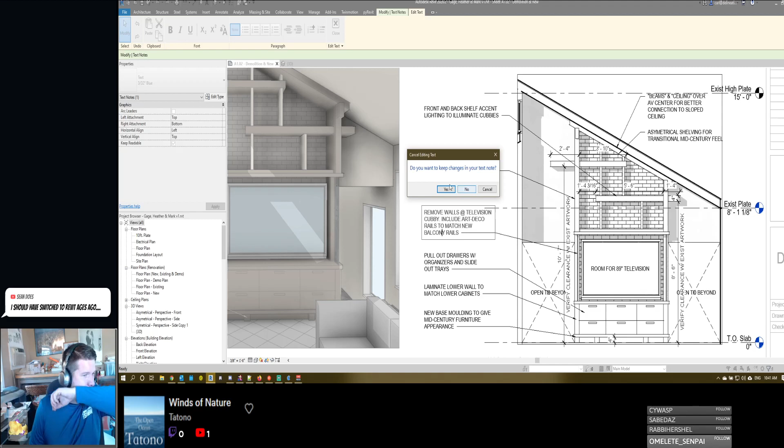Goodness. That didn't seem to help right there, did it?

In your professional career, you'll have plenty of chance to use it, so it's not the end of the world. I wasn't using Revit when I was in school, so.

And truthfully, there's a really good chance, because if you think about it, Revit's not new, it's starting its end life in terms of how long it's been in the industry. So there's a really good chance that you're probably going to end up coming across new technology and software that blows Revit out of the water. Who knows?

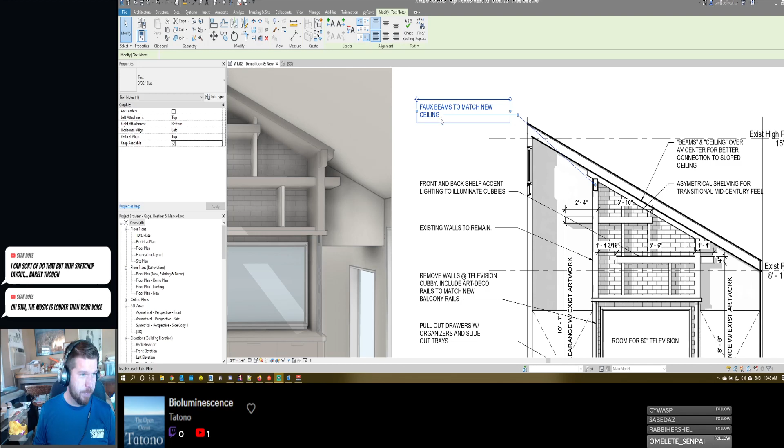Hopefully that's better. Thanks for letting me know. It's hard for me to tell because the music in my headphones is different than the music that's being piped out, in terms of volume. Maybe I don't need this one. I think that's what it is. Is it still too loud?

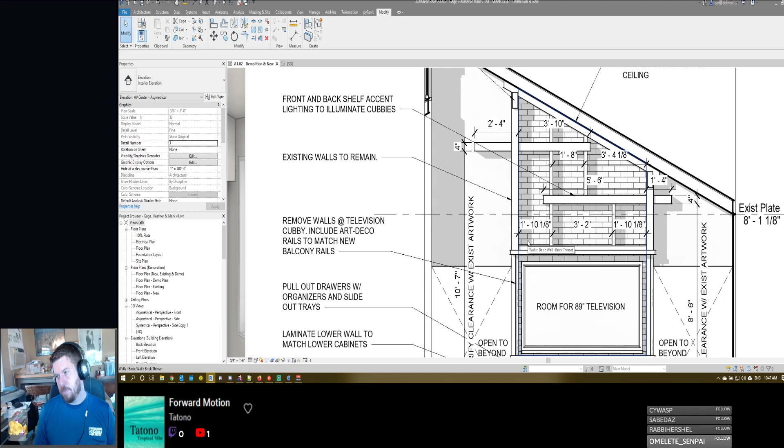I'm gonna need another section right here, probably. I feel like this needs to be at a larger scale. I think that's what I'm going to do. It's a half-inch.

Let's move this out of the way for now. I didn't mean to do that. This will make no sense now.

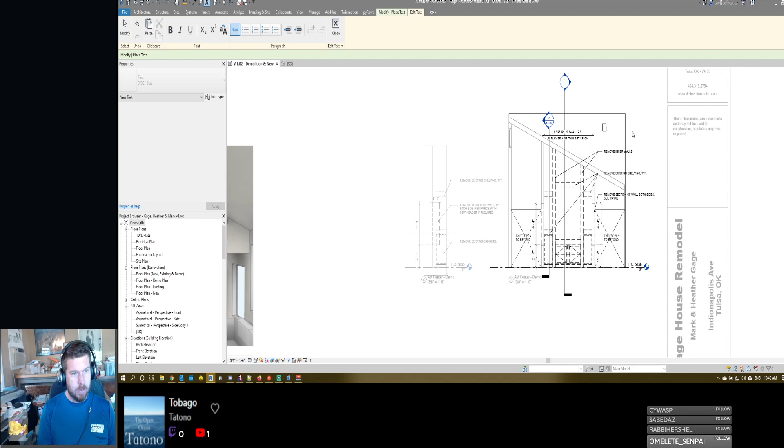Remove inner walls. Need to put a note up here: contractor to verify structural integrity of existing systems prior to removal of those.

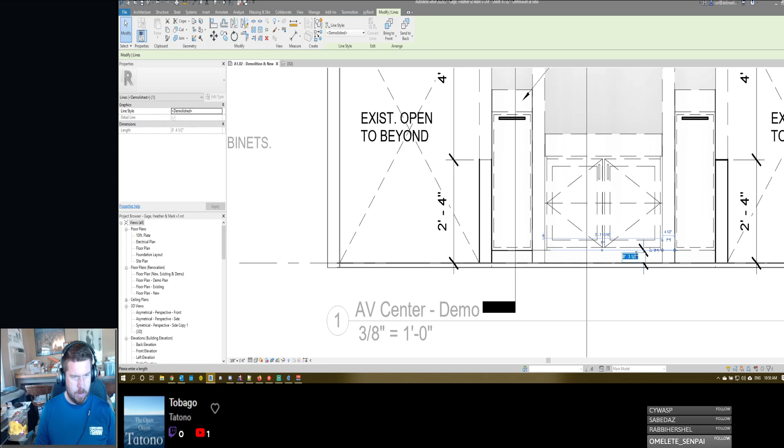Huh. Guess I can bring this out to match this.

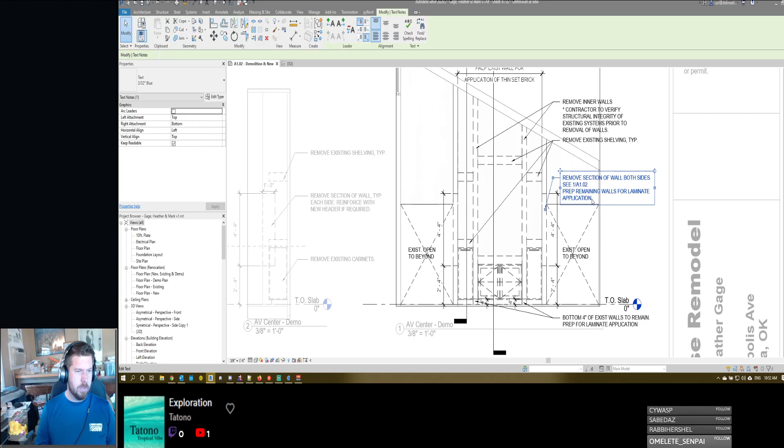Also need, there's another section right here. I should actually probably just do this.

Should I do it inside the dimension line? I think it needs to be outside the dimension line. Maybe the dimension gets a little closer too. There we go, make sure that gets through there.

Remove section of wall, typical each side. Reinforce with new header if required. Let's do... oh goodness, what did you just do? There we go. And what we need to do.

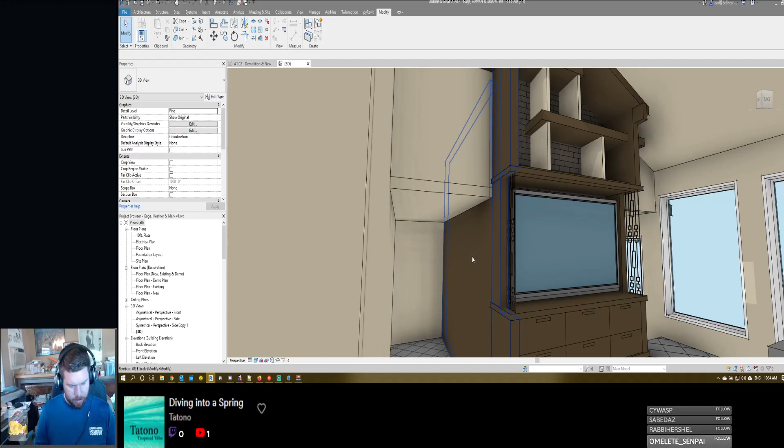How do we transition laminate? So we need some kind of transition right here. Resistant paint, laminate, transition.

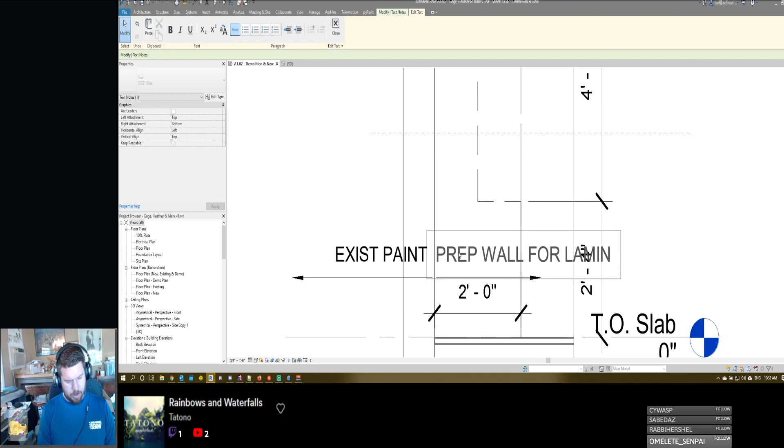I'm gonna put some text here: existing paint, prep wall for laminate application. I have to think about how that works also.

Already got that right there. Not sure how that works. I have to look into that.

This is where that's going to be interesting, because if I do a quarter round, it does something different here. So I'm not really sure what I'm going to do about that yet.

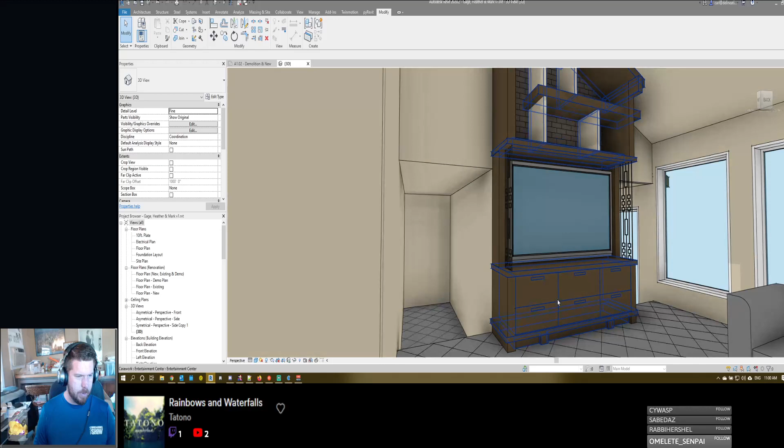Alright, I do need a section through here. Oh, for crying out loud.

Somebody's got something going on the grill. Yeah, we don't need to show that one. Yes, it is just Valor's turn.

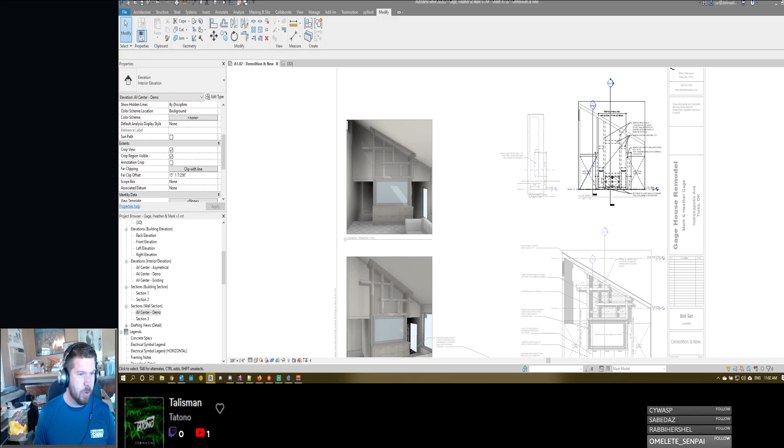Good. Oh boy, that doesn't look like the section that I just made. Here we go.

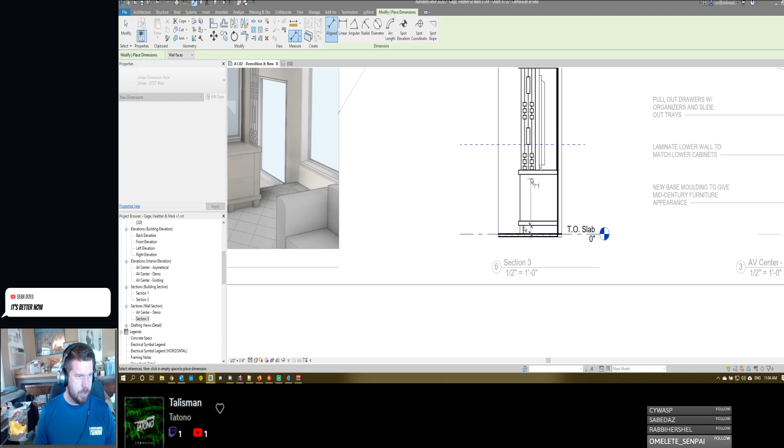Okay, let's see. Four inches. That should actually vary.

We're going to need to route the AV through here. And I think what I'm going to do is have them put in one of these things, AV pop-up outlets.

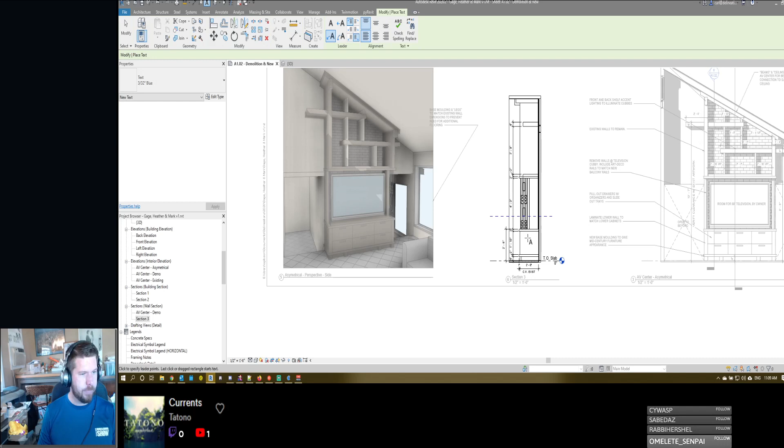Oh, come on. Oh, thicker than it sets.

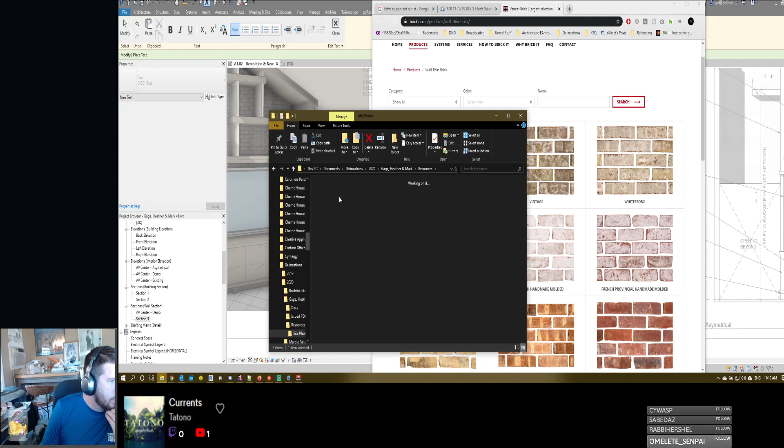We have something that matches. This is what we're trying to match. That's pretty close, maybe a little bit lighter, something like this. Let's get... oh wait, I picked the wrong one. Cafe latte.

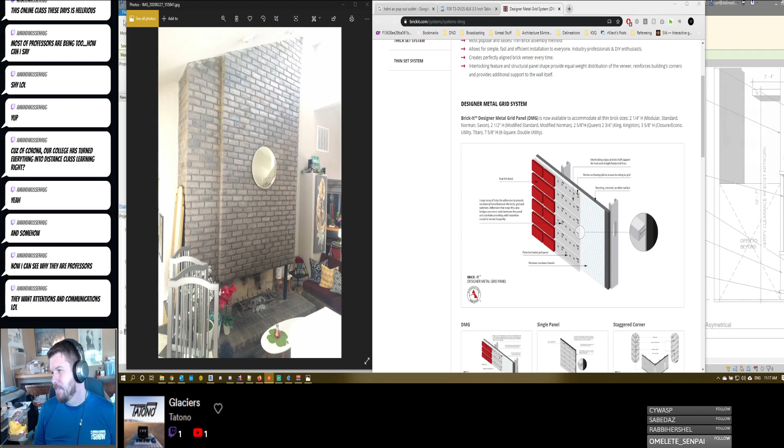So what I'm curious about is whether or not this can be used without the moisture system. Does it require... I'm gonna chat with these guys. Yeah, because it's an interior application, so I don't need this. This shows that it's a moisture resistance barrier, and I don't need that.

I have a question about your DMG system for a thin brick installation. Does it require a moisture barrier system for interior applications? First, though, good afternoon, how are you doing today?

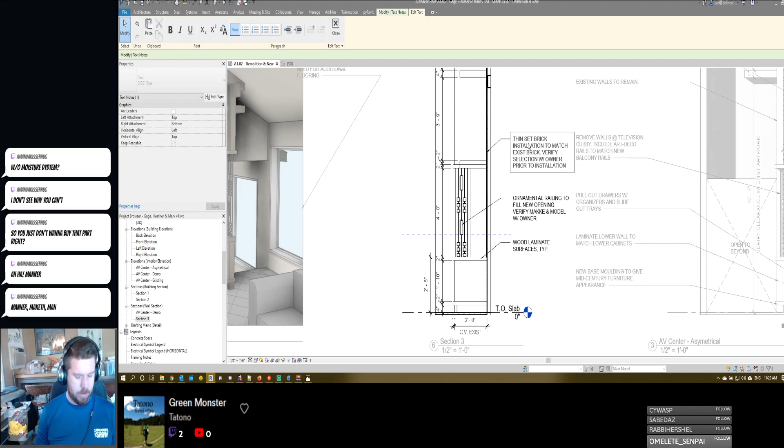Cricket. No, I think that is all.

Yeah, I don't see why you can't either, but I always like checking with the manufacturers. They love talking to us, because when they're talking to us, that means that we're wanting to use their product.

Manners maketh the man. That's a great quote from a great movie. In this industry, you chat with someone, and if you type all in cap letters, they all understand. Yes, they do, but I still like to be considerate. Manners maketh man.

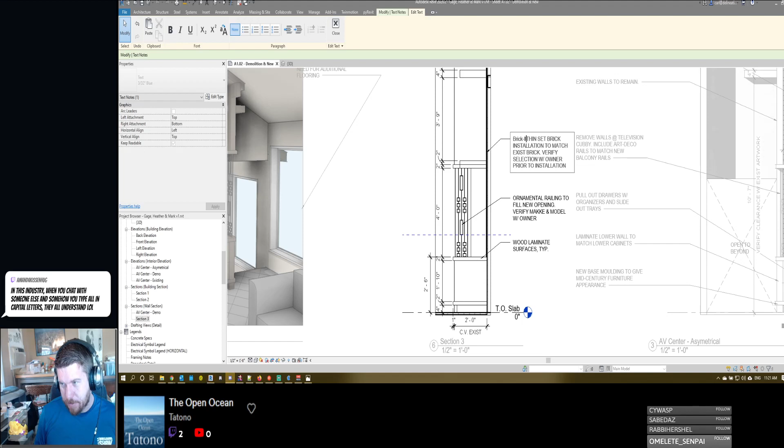So Amanda, are you weathering the COVID-19 pandemic? By the way, I've decided that 2020 is the ironic year to have an iconic year for me, so I'm keeping the beard all year long. I have decided that.

Let's see here, so what I'm going to do is we're going to call this Brick It. What's the thickness?

I mean, I think it's literally the thickness is the thickness of the brick, because that track surely can't provide that much thickness.

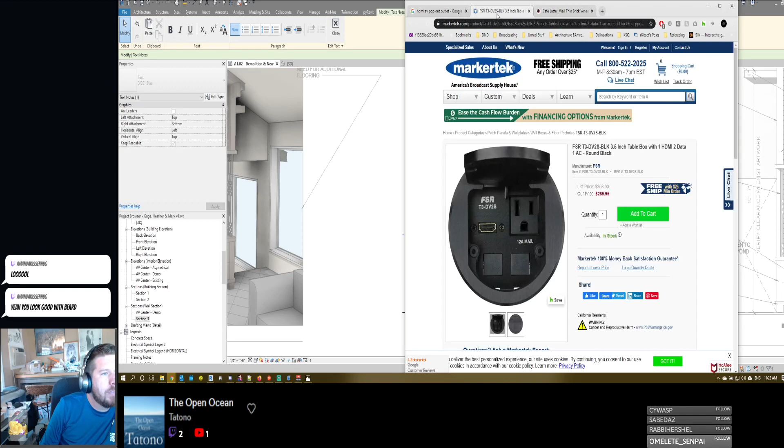Half an inch, and I think that's what I put on here. Half an inch, let's do 3/4. Call it safe.

Brick it. Thin set brick, cafe latte. Color: cafe latte, or similar. Let's go ahead and do this.

Oh well, thank you. One thing you learned in school newly is... Can't wait to see the rest of that sentence.

And I don't think I realized that you were still in school. I thought you had finished. Or did you go back? Maybe I knew that you went back to school, I'm not sure.

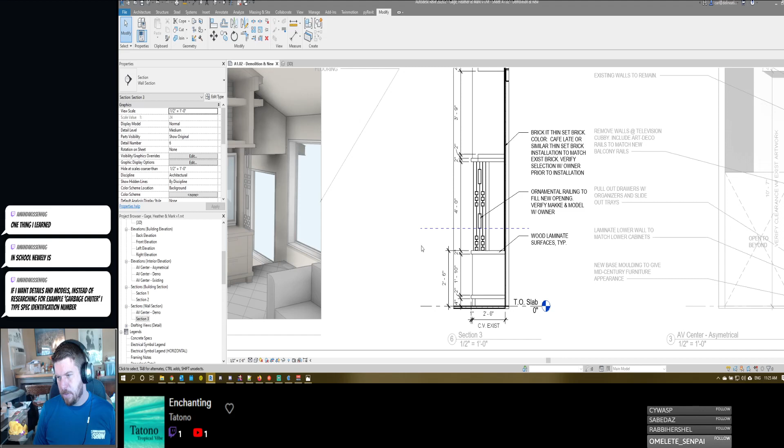Ah yes, spec numbers. Yep, if you know the spec numbers, that does help, like if you know what division it's in.

One thing I need to figure out... that makes sense. Technician is more like a drafter, technologist is more like a facade designer.

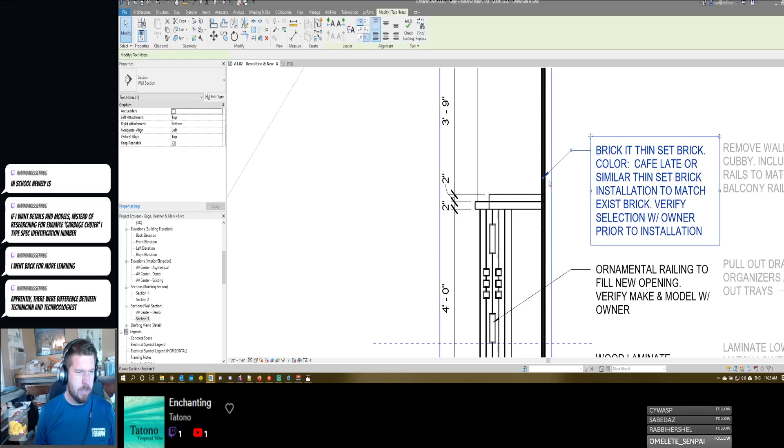How are they going to build these shelves? What were we doing with these shelves? I believe I saw something in their pictures or my pictures. Whoa, I don't know what that was, it just flew over, but it was big.

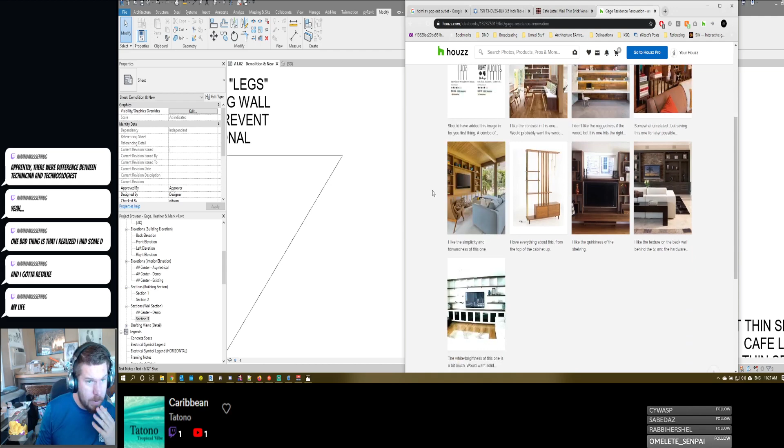All right, I don't think it was... oh, maybe it was this. It was this, so the lighting. I think we want to put lighting top and bottom. So what I want to do...

We could go really cool with this right here. We could hook the color changing lights to their TV so the ambient color behind the TV matches what's on the TV, I think that would be pretty cool. I'd have to look into that. LED lighting to match TV ambient color - there's a way to do this.

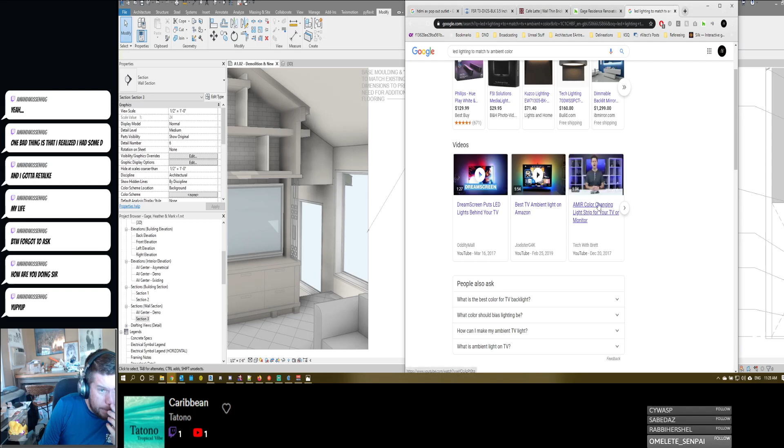And I think it's something like this. Yeah, I think that would be pretty freaking cool. So what does that look like? I think that is going to be interesting.

I'm doing okay. I got hit a couple days ago by something that wasn't COVID, I swear. Everyone's pretty sure it was not. I never had a fever, I just had severe sinus issues. Other than that, I'm doing pretty good.

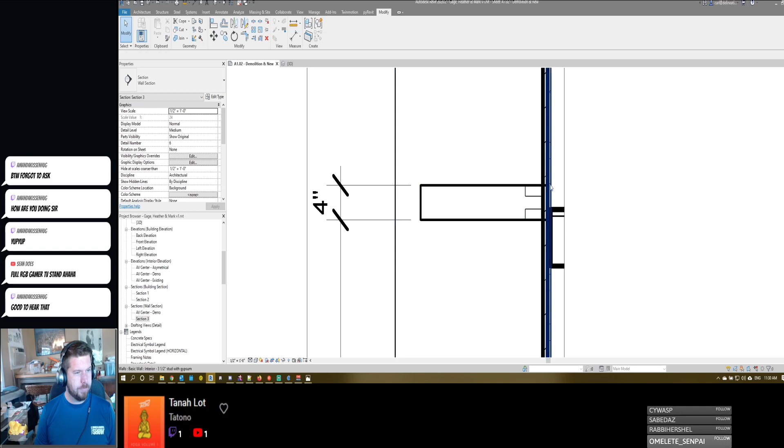So this looks like... jeez, what does this look like? It's gonna be... something like this. With an LED strip there and there. I think I might have to...

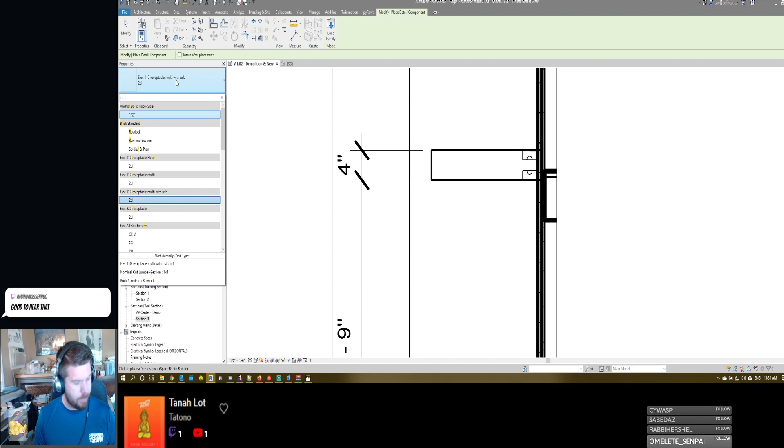That thin set brick is going to have to stop at each of these shelves. Is it? Man, am I going to be able to do this? So here's what's going to have to happen. It's going to have to be something like this. I'm either going to have to make this really thick in order to get these shelves to be usable.

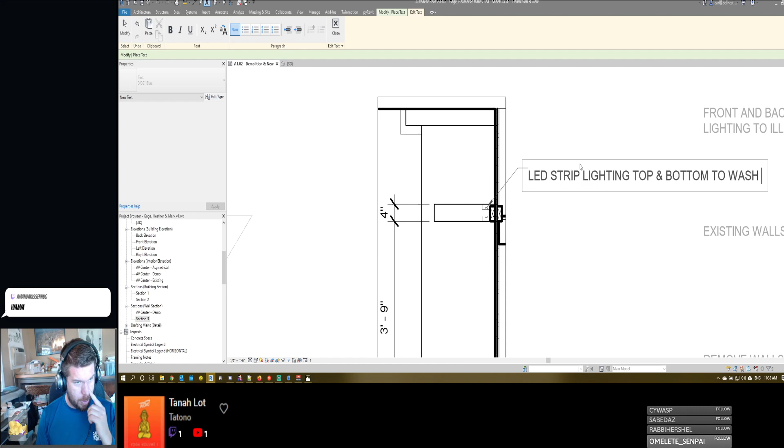I'm going to have to think about this for a bit. What I might need to do is just get the bid set out. LED strip lighting, top and bottom, to wash brick. And then do we put an LED out front to wash whatever is sitting in there?

The thing that bothers me about this is that this is not going to work. It's going to have to be thicker. I'm going to have to find some good systems for this, and look at details, because right now that is not going to work.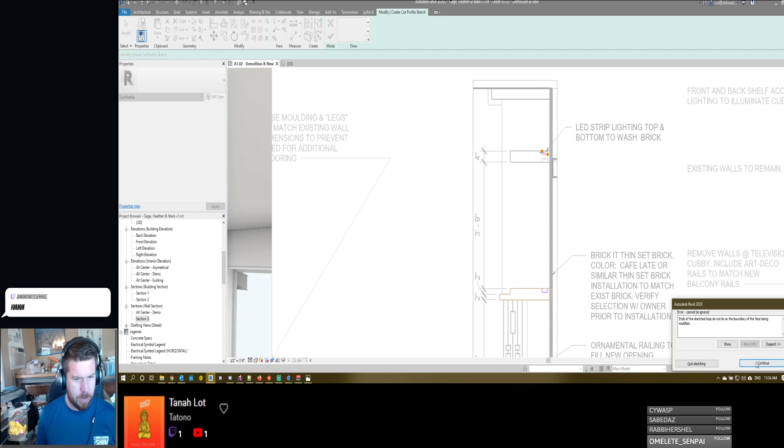What I need to do, I'll do a cut profile here. Will you let me do a cut profile? Well, that's interesting, I wonder how that works. Okay, so I can do it there. Huh. Okay, we'll just do this.

See how many times I can click the wrong thing. Because we don't want the LED to be visible.

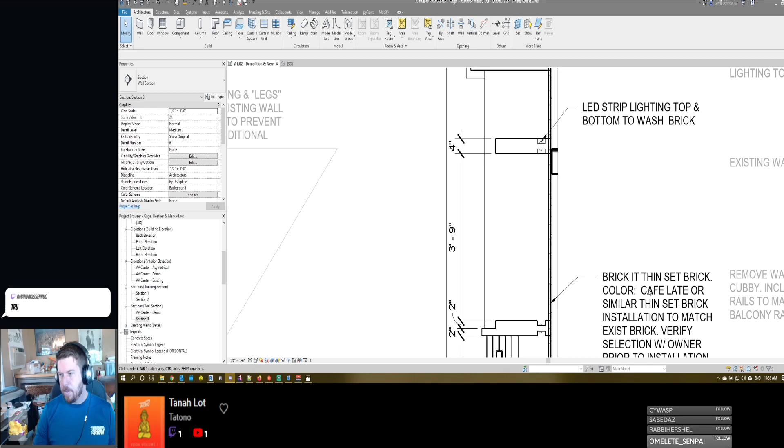Someone had to look up what a yard was. Wow.

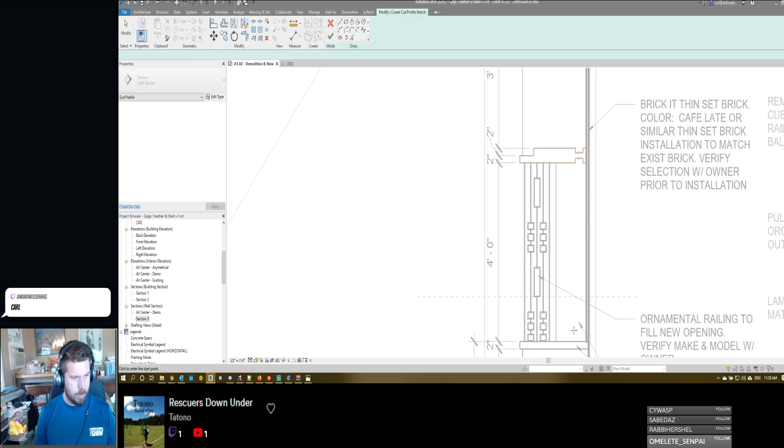That's just silly. Copy.

And let's just do this. What was it called? Dream Screen LED backlights. DreamScreen LED ambient backlighting. Verify compatibility with TV model prior to purchase.

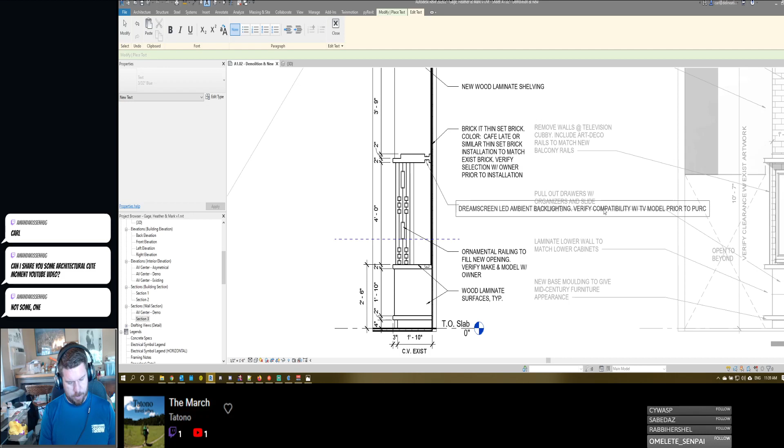I don't like that it crosses that, but we're gonna be okay with it for now.

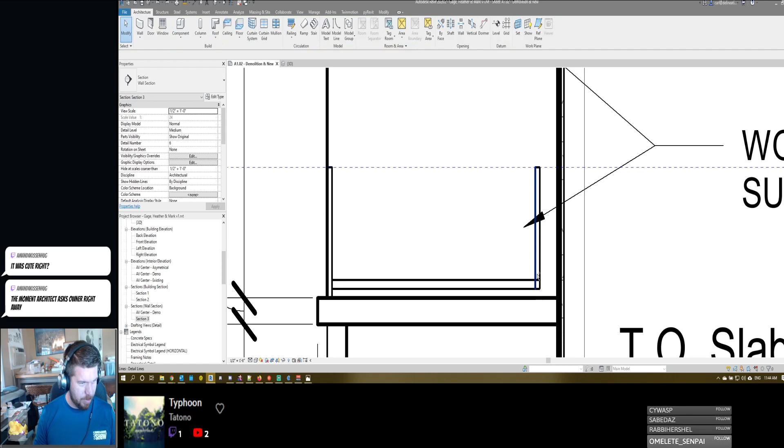I'm just going to do this for now. Alright. Apparently media controls on my keyboard do not work for Firefox.

Do I really have the top bigger than the bottom? Oh my goodness.

Let's do 1 foot on bottom. There we go.

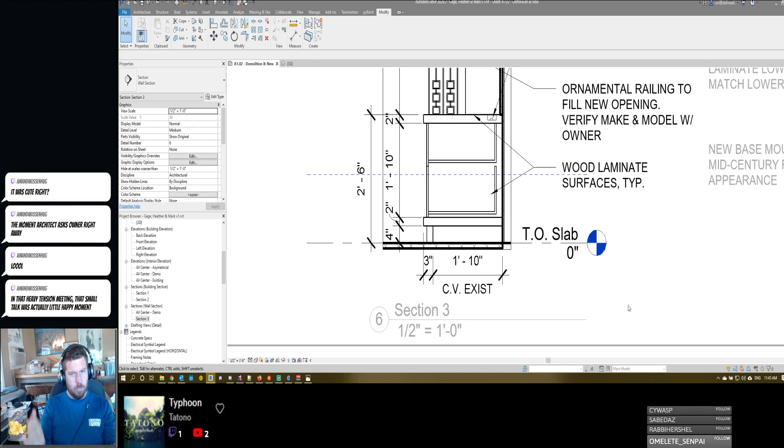Now I'm trying to remember, I think they wanted swinging doors with pullouts, but here's the thing. I think the owners wanted cabinet doors with pull-out stuff, but if you open a door, that means you're having to stand in front of it, which means when you pull that tray out, you still can't get to anything in the back. So I think if you just pull the drawer out, you can stand next to it, because if the door is open, you can't even stand next to it. Does that make sense? I feel like it just needs to be one or the other, not both. They want doors that swing open and pull out trays.

Toe kick depth to match existing.

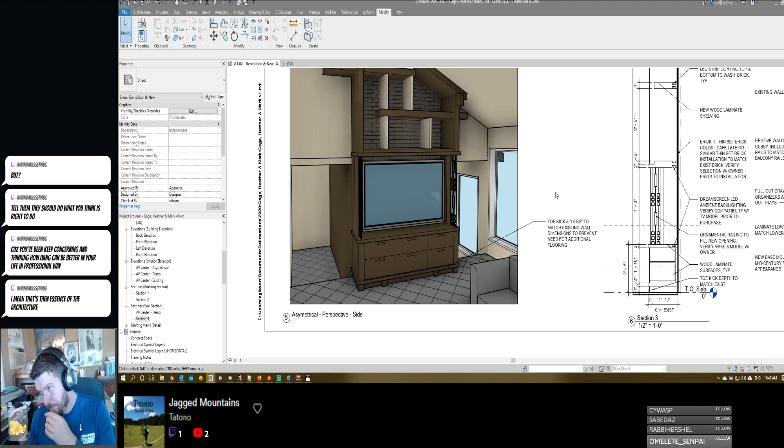Revit 2020, and we still have the same text issue that we had in Revit 2016, where it likes to not type sometimes.

Should we just do that instead of having it out here? I don't think so. I'm gonna take it off that one.

I think so, but I'm not sure. Nothing's really sure yet. I'm thinking that maybe I have to do my taxes first.

I'm going to get rid of shadows on this.

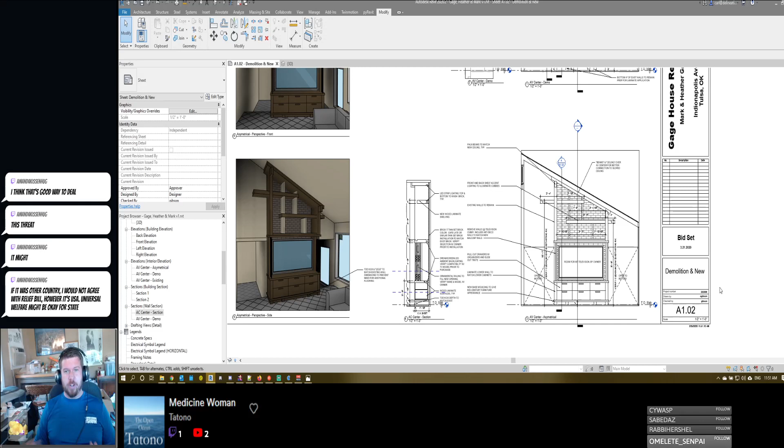I think, so I know this sounds petty, but the most frustrating thing about the whole COVID thing is that we now have a new verb, Zoom. Everyone is Zooming. Whatever. You know, when everyone wanted voice or video phones, no one would buy them. And I guess it's because we didn't have a verb for it. But now that we're Zooming, everyone wants video phones. And...

I guess the other thing, well, it's the tool that everyone's using for their online classes. And I don't know, I guess the other thing that's frustrating about this whole thing is that for years...

Democrats, and I don't want this to be a Democrats versus Republicans thing, but Democrats have wanted to just give money to people to help, and the Republicans have been like, maybe we shouldn't spend that much money. But now that the government's like, okay, we need to do something to keep people fed while nobody's working, let's give people money - the Democrats are like, whoa, hold on a second. It's just frustrating to see that type of game being played when there's obviously such an issue. It doesn't make sense to me.

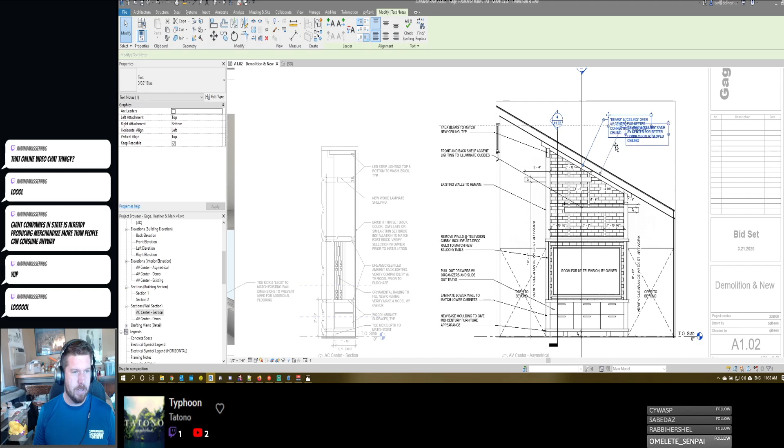I'm more worried about what it means for everything coming down the road. What does it mean for the way my kids are going to have to live? Like right now, they're talking about there might not be school for the rest of the year.

Right now we're halfway through the first week of 2 weeks when it's closed, and I have a feeling we're going to close it for even longer. Because I have a feeling at that 2 weeks is when things are going to start peaking, and the numbers are going to still be rising, and they're going to be like, we're just going to close it for another 2 weeks. And then I think at that point, you're only a month away from the typical dismissal date for schools.

So I have a feeling that my kids aren't going to finish school this year, and does that mean they have to repeat that grade? Does that mean that seniors don't graduate? I know there's some people watching who are thinking, I have a thesis to defend - what the crap am I going to do with that?

So I don't know, I think there's a lot of... I think my dad put it pretty well. He said it's going to feel very post 9/11 for a while. And I think he's right. I think it's going to feel that way for a while.

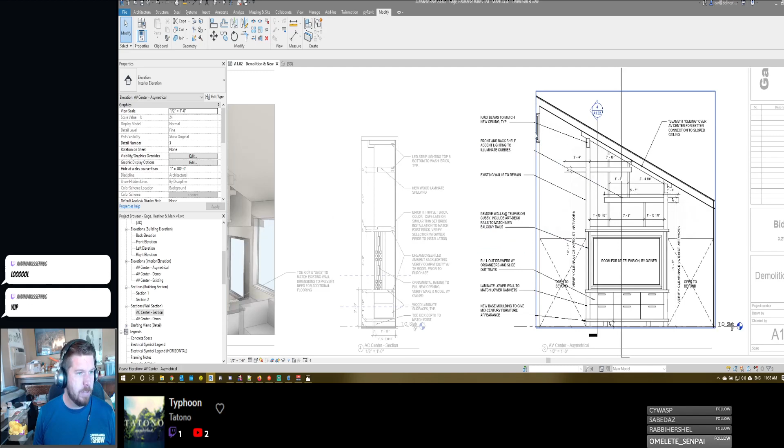But then I think it's going to normalize. We'll either have a new norm or...

Man, this really doesn't look like it's parallel. But I know it is.

So anyway, yeah, I think there's going to be some good things that come out of it too. I think a lot of people are going to realize that they are capable of doing things outside of corporate environments.

I saw someone post the other day: here are some companies that started in 2008 during the last major economic recession. You have things like Airbnb, PayPal, all these companies that are big now. Uber started in 2008. So you've got all these things happening that I think will be for good.

I think it'll also make people realize how dependent they are on commercial economics, and I think you're going to see an increase in self-sustainable living. Not in the sense that people are going to buy sustainable houses, but more that people are going to start planting gardens and living slightly healthier lives. I think a lot of that will go back to a norm, but it'll become more of a norm to have a healthier life than it has been in the past.

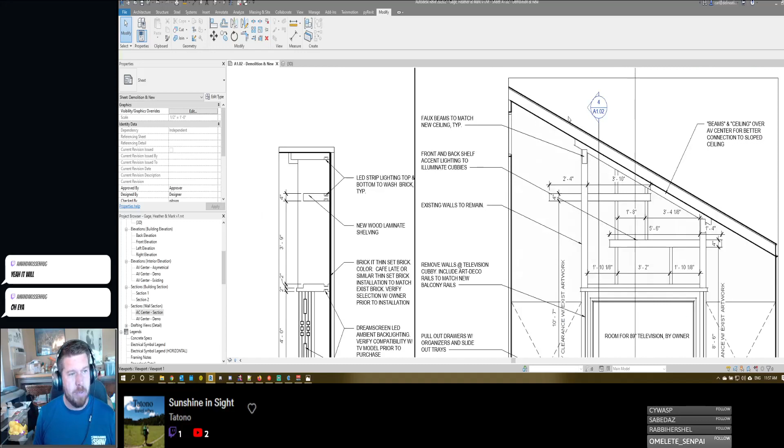People are going to realize that self-care is important once they realize, oh crap, all this rest at home, I actually feel decent. I think work-from-home, get-rich-quick scams are going to be on the rise too. That's a low-hanging fruit, an easy one to predict.

I don't know what I'm going to do about these faux beams. And what about these? Let's take some of this and put those... excuse me. Goodness. Put those over here as well. Oh, piece of crap.

4 of them. So let's go 1, 2, 3, 4. What?

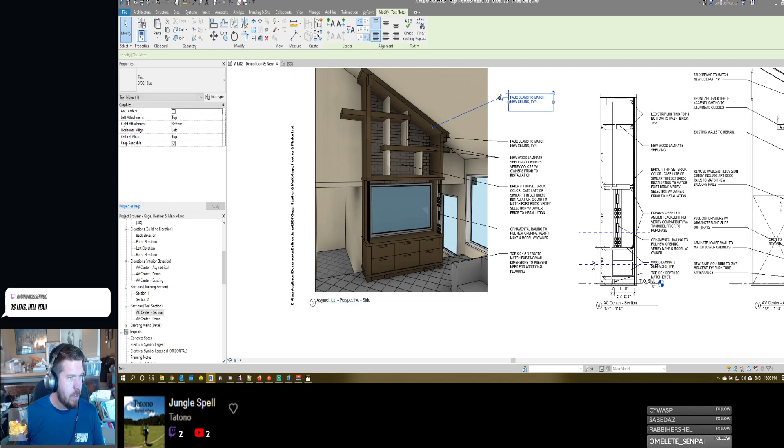It's more fun than not having a tilt shift lens ever. I think if you rent a lens for a week or two weeks or something like that, the rental price goes towards purchasing it. And if it's a used lens or something like that, you can usually get a pretty good deal on it from, I think it's lensrentals.com or something like that.

See, and I feel like the ceiling panel is going to be, it's either going to be plates that are run across or it's going to be laminated. Is that right? I think you can rent it for a lot less than that. Hold on a second.

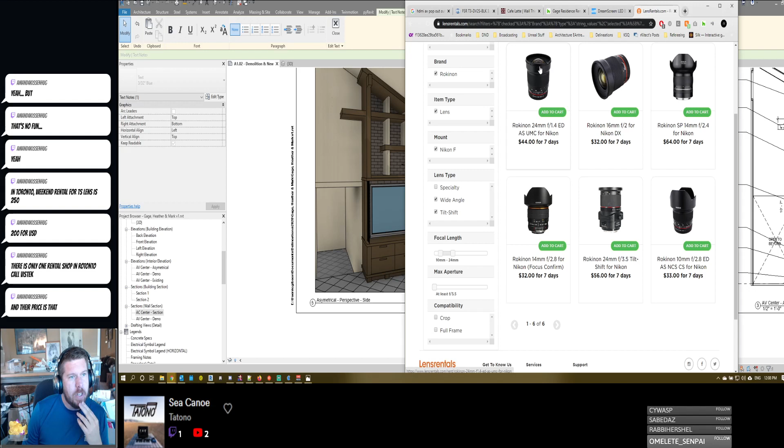Well, that's the problem, you're going to a rental shop. You need to go to lensrentals.com or something like that. Let's see, wide angle. It is a Rokinon tilt shift, and I believe the one I got was a 24mm, so $56 for a week.

Yeah, I'm pretty sure that's international. Let's see, so for Canon, hold on computer. Photo, Canon, lenses. Wide angle, oh they've got tilt shift down there. I don't know what's available, so I'm just going to do tilt shift. Wide angle, so they have the Canon which is more expensive, that's $100 for the week, and Canon TS which is much better. Maybe if I pick Rokinon.

There's the 24mm, $56 for 7 days. And let's see, shipping rates. I don't know what your zip code is. Toronto, Canada. What do I put in for international shipping? I'm guessing you don't have zip codes. Let's see.

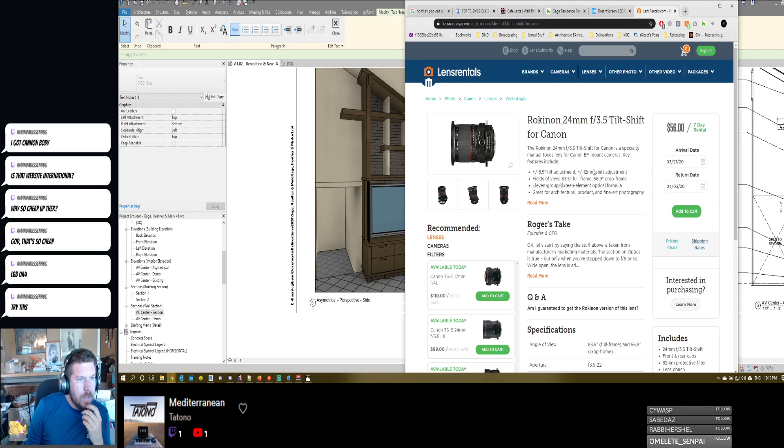Alright, we'll see. Shipments. It does not like that. Surely they do, though. But if they don't, maybe one of these other ones does. Shipping. They do not ship internationally, so I wonder if that's going to be an issue. Lens rentals, borrow lenses, rent, shoot, return. You might have to check and see.

Well, that stinks. Maybe you call them and say, hey, how do I get your lenses? New ceiling panel, I should probably dimension that.

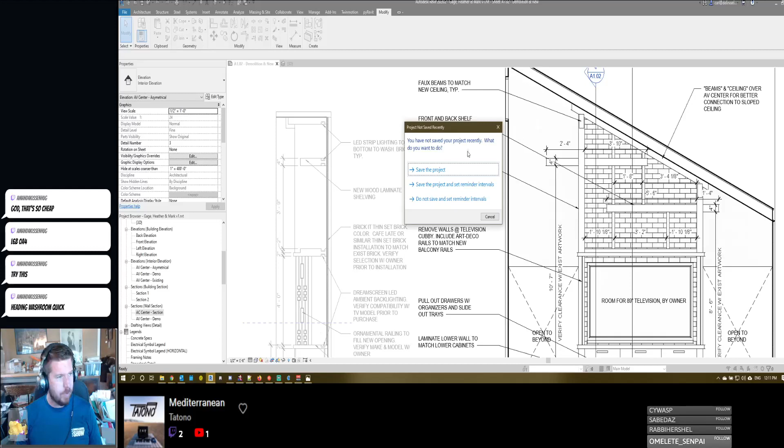Let's make this 6 inches. Actually, I feel like it should be like 4 inches. And let's make this like 4 inches as well. We're gonna have to stop getting lunch here soon.

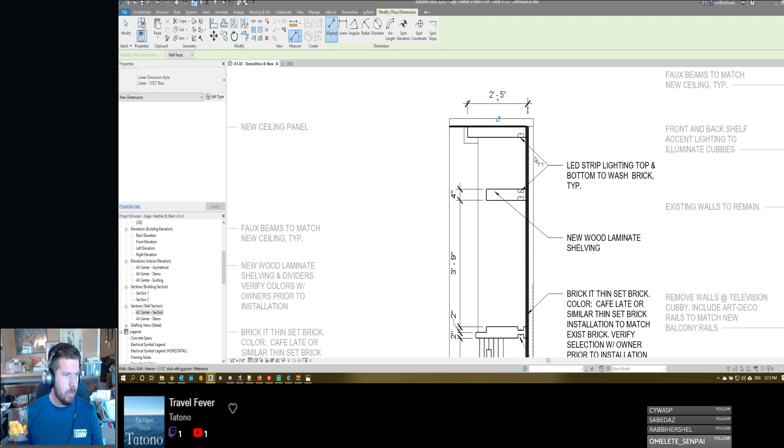Alright. Move the whole thing back. It does. There we go. If you want to be lazy, just use the same note from another drawing. I could do this.

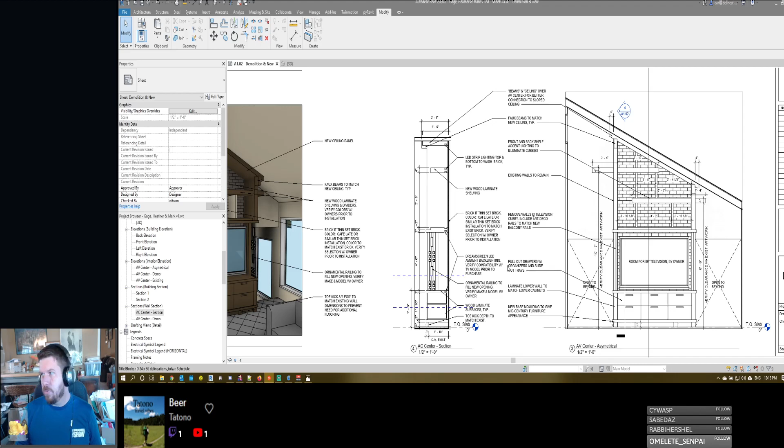I think this is going to be enough for now. I don't really want to move that. Why does this keep doing that? I wonder if moving this over and putting some notes on this side would be helpful. Laminate to edge of existing wall. Transition strip.

I still need electrical. I need to show... actually I'm gonna do that. Room for 89-inch television by owner. I need a note in here about providing electrical. Why can't I click outside of that? Provide electrical. Oh man.

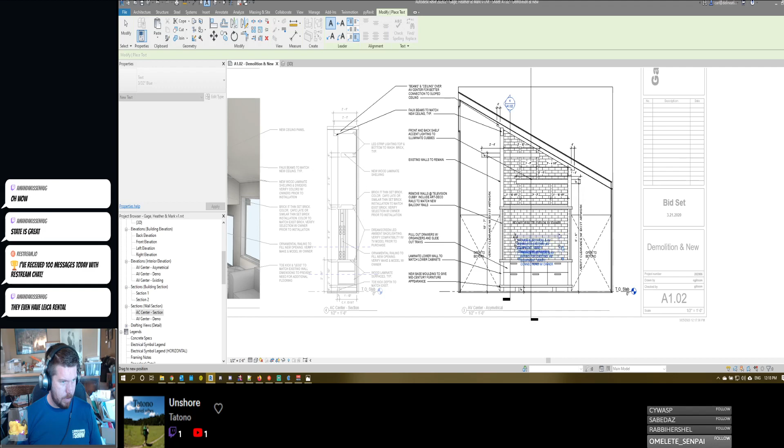Maybe wiring. Existing AV equipment, verify connections with the owner. Is there an existing switch? I think there's an existing switch. I think this right here goes to provide electrical and AV wiring for existing equipment, verify connections with owner. Use existing electrical where possible.

Route AV from cabinets to upper wall TV connection through wall. We can put it, that'll make that a little bit more even. Provide electrical and AV wiring for existing AV equipment. Notes: back of wall for TV connections through wall. Verify connections with the owner, use existing electrical where possible.

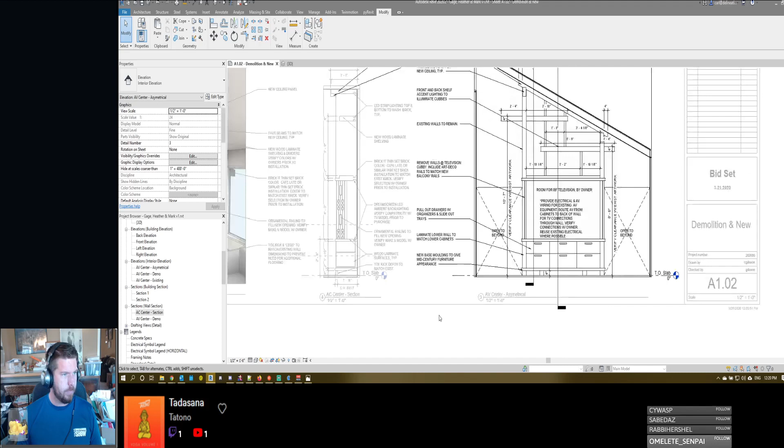What's today, the 25th? I think we're going to see if this flies. I think we've got a pretty good set here. Let's see, construction. Verified question about substrate. It is not able to be rock.

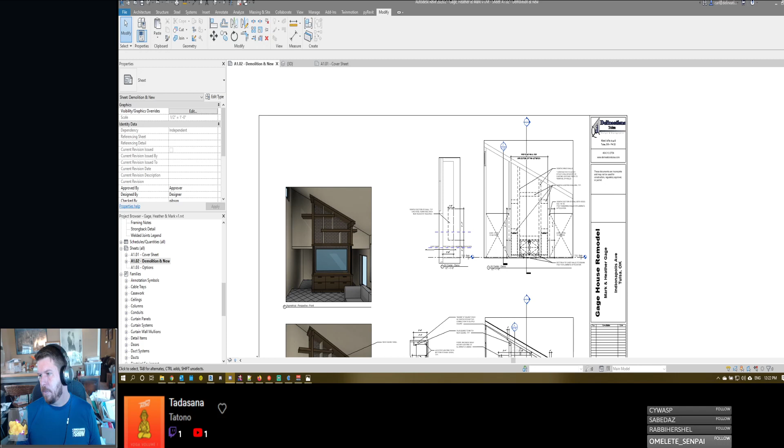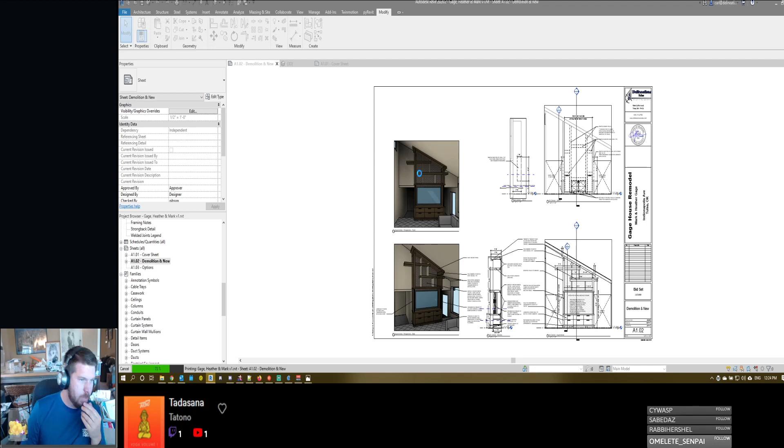Alright. So I think I don't think that it needs to be stamped. I'm gonna go ahead and stamp it. Gonna print this. And I think what I'm going to do is, oh man, full...

Mirrorless. Okay, well I guess I'm not going to have to guess. Good job. I was going to say Sony because they're pretty well known for their mirrorless bodies, but. Nice. So, good set.

You know what I should do is I should at least put LED strip lighting, reuse existing lighting electrical, and switch location.

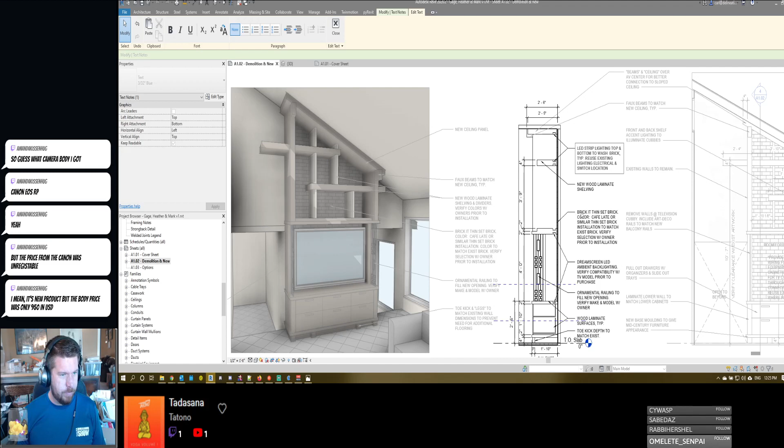Okay, let's print that again. Did I close it? I think I closed it. Unregistrable? Yeah, it's not too bad.

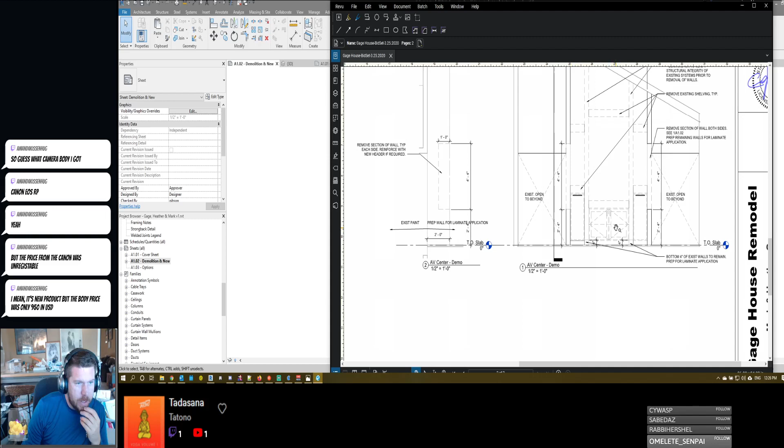Alright. Did I not put remove existing cabinets on here? Oh my goodness. Oh my goodness, what the crap. Oh my mouse macros are not working. That's what's going on.

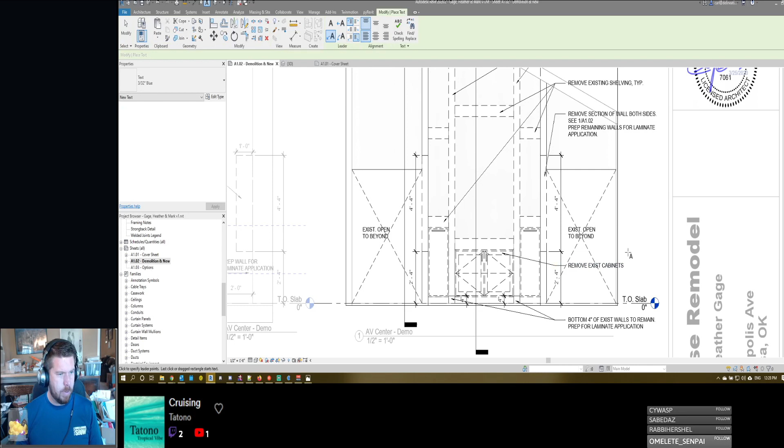Alright, there we go. And then I need to say remove existing cabinets. Goodness. Alright, save that. Let's get this out the door.